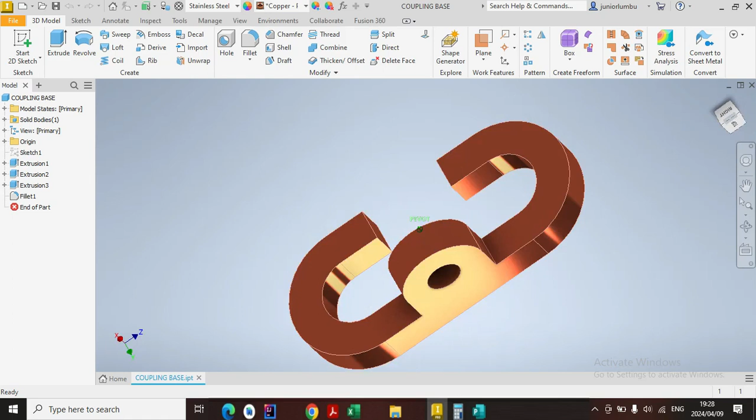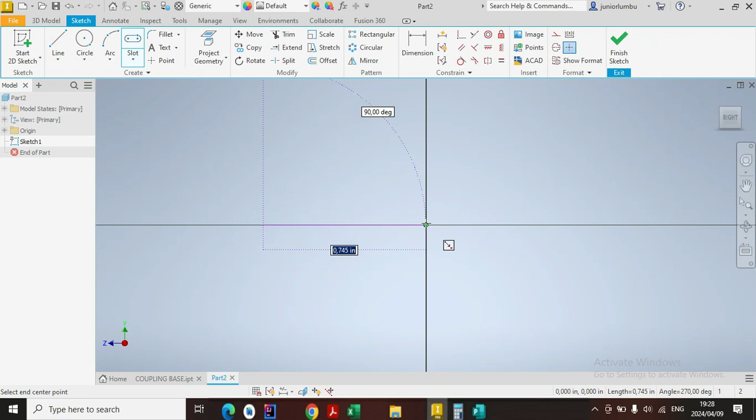Now we're going to start with a slot. Okay, so here is my slot. There's my first one, then here comes my second one. I'll make sure that from here to there I have 2 inches. Yeah, good, 2 inches it is.

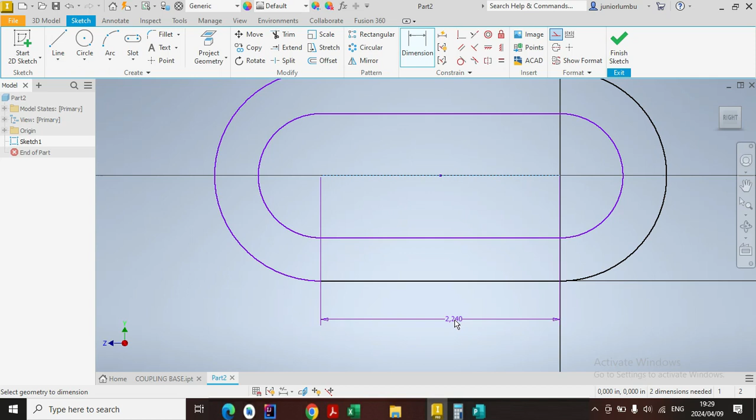Then this one here needs to be 2.5 inches. Now the middle one, that needs to be half an inch as the radius. Now that I have that, I'm going to come here and go for rectangle. My rectangle will go like this, and this other one will also come like this.

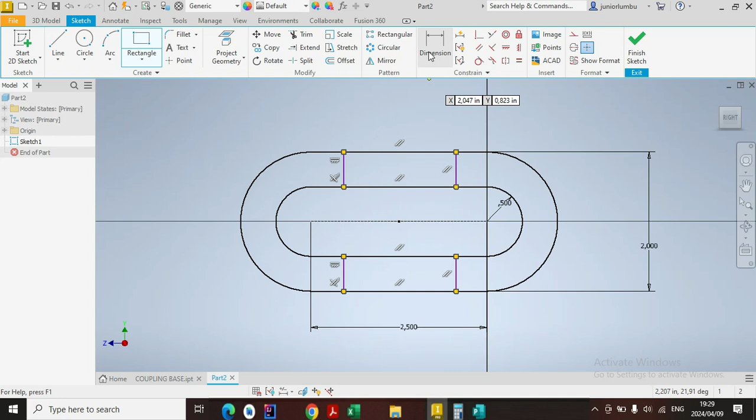Now this one needs to be 1.25 inches, and from there to there I need to have half of it, which is 0.625 inches. Now I have it both sides.

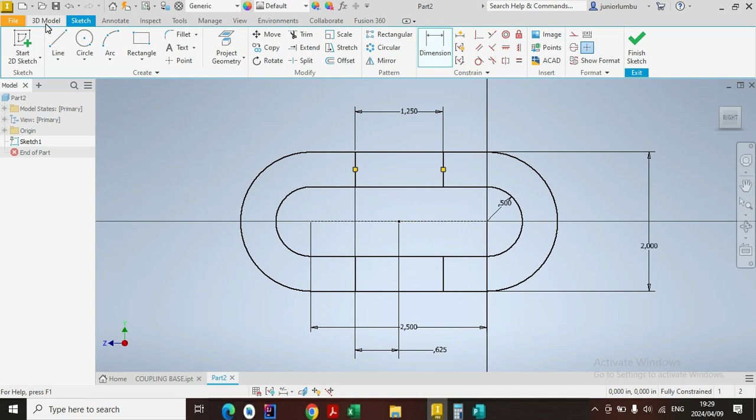So now that I'm done with that, I'm going to come onto the model. I'm going to click on extrude. I'm going to extrude that part as well as that one by half an inch, 5. Then plus, I'm going to extrude now this part here by...

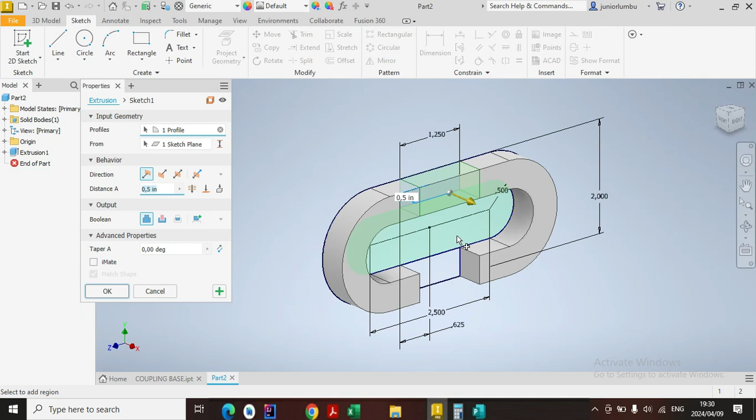1.625. Okay, then I say okay. Now that I have that, I'm going to come there. You see that part highlighted. I'm going to right click on my mouse and then say new sketch.

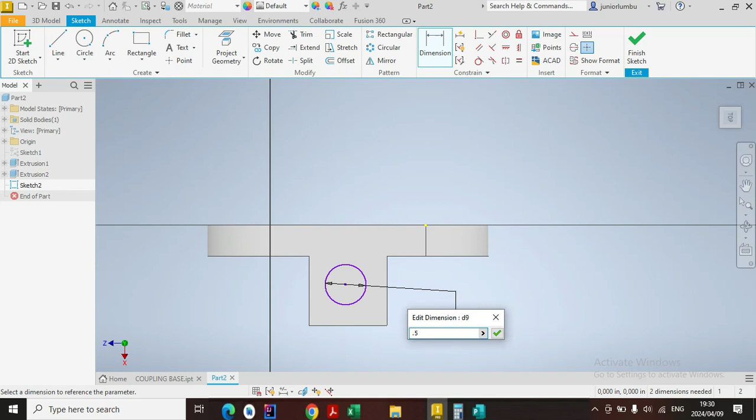Okay, then I'm going to come with a circle. There is my circle, and that one needs to be half an inch diameter, and middle of this one, so that will be 0.625 inches, and from there to there I want it to be 1 inch.

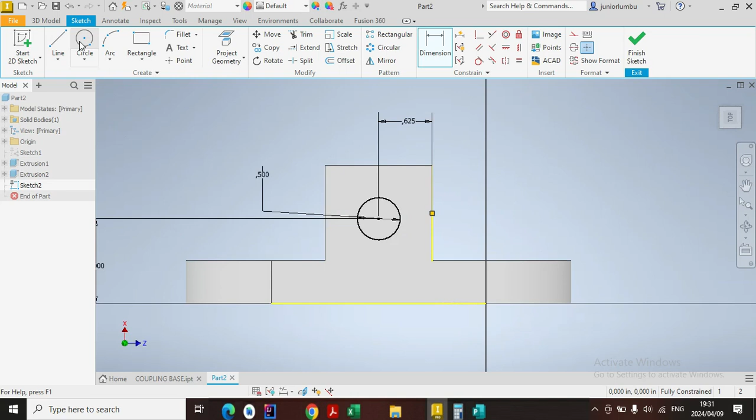That is good. Okay, we can turn it like that. Let's go like this. Now I'm going to come on 3D model. I'm going to click on extrude. I'm going to cut that one now.

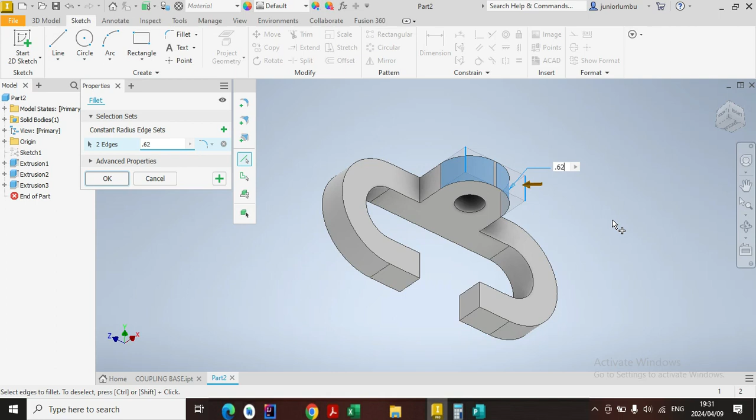This side, there it goes. And then I say okay. Now I'm going to create a fillet there and here, and that one needs to be .625. Right, I say okay.

Now you have your coupling base. The next thing that you want now is to give the material. So what should the material be here? You're going to come there and select a material, so we can go with carbon steel.